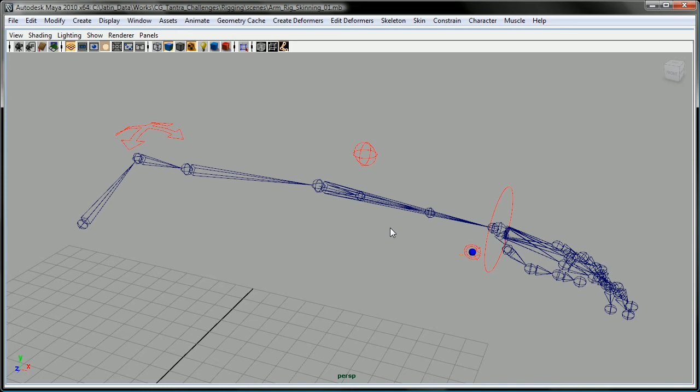And right now it's 3 a.m. in the morning, and all the dogs are barking in the street because I'm the only person awake at night. So let me explain some stuff about how I did this rigging, and let me open the hypergraph first.

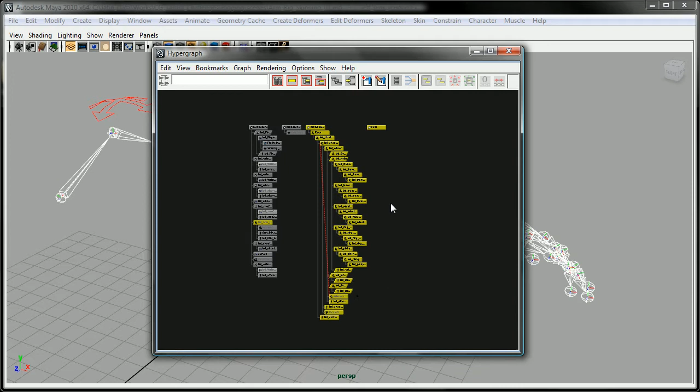If you check it out, my hypergraph is pretty simple. These are the skeleton structure and some constraints I used, and these are the control groups, and these are the mesh groups.

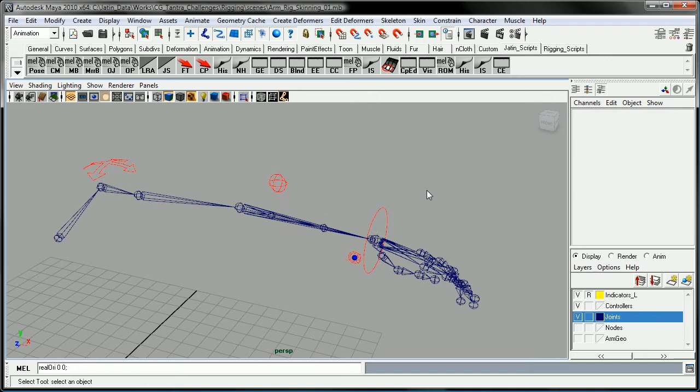Just a second, let me take out all the unwanted things. So you can see some pretty simple stuff, just like normal rigging. This is the IK setup.

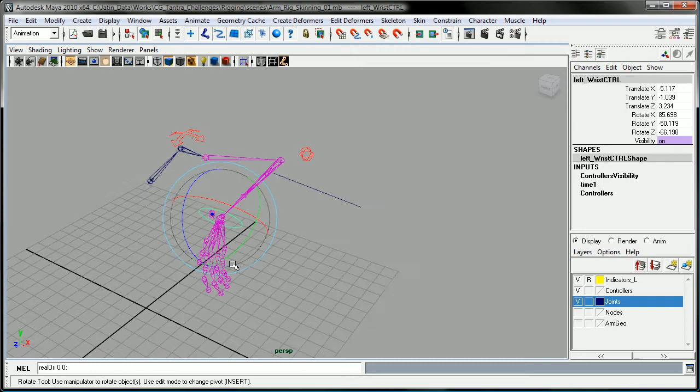You can set the IK, and you can twist the wrist and rotate the wrist. This is for the pole vector control, like twisting the elbow and all that stuff. This control is for the shoulder.

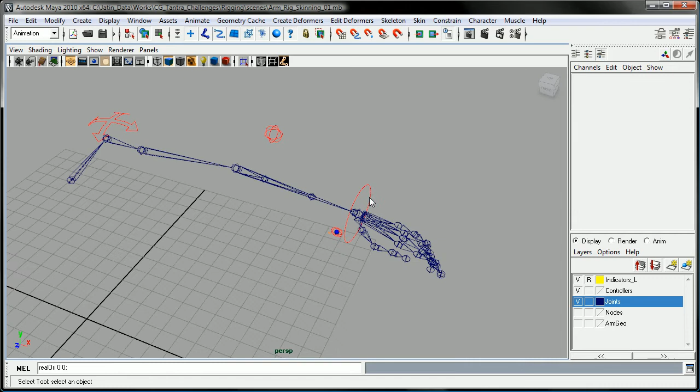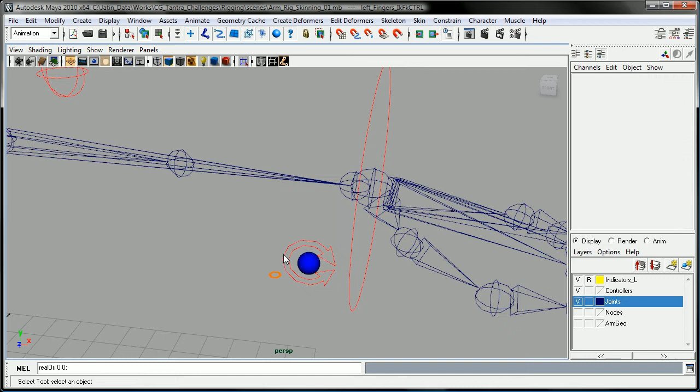Now I created some stretchy joints, a stretchy IK setup. The main thing I did was add some indicators so the animator can understand what's going on and what parameters are already set. Here I created one controller for the fingers with FKIK and stretch.

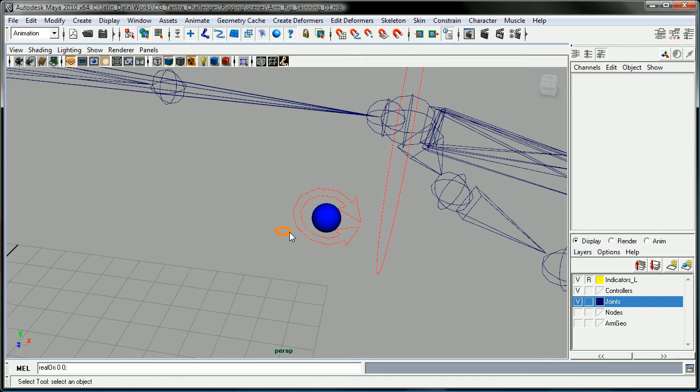As you can see, this is the FK IK setup and this is stretch. Over here you see one sphere with blue color, and here some element — this is basically the stretch IK indicator. Right now stretch is 0, so if I make it 1, it becomes like spring, stretchable. That's why I use this indicator, so the animator can understand the stretch parameter is on.

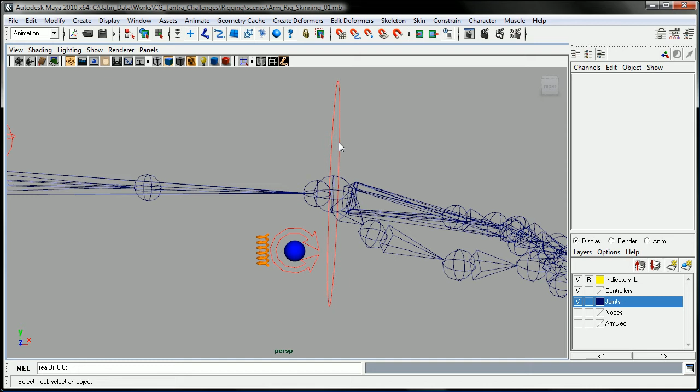So they don't accidentally animate stretchy things if they don't want. The same thing I did for the FK to IK blend — I used blue and green color. Right now it's IK, blue color for IK.

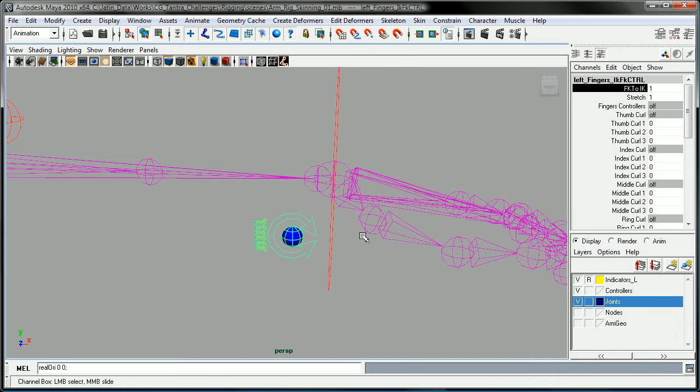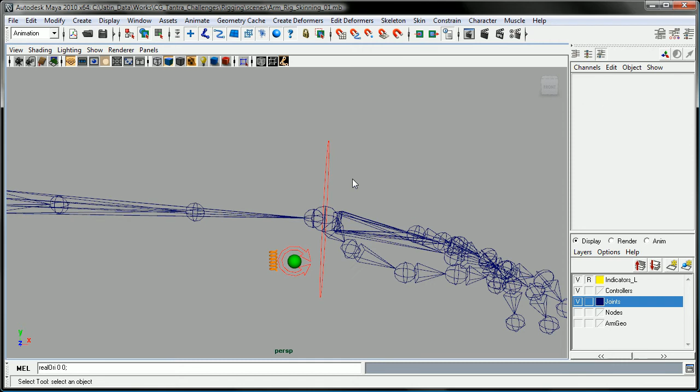If I go to FK mode, the sphere turns green. So the animator knows that green means the arm setup is in FK mode, and blue means IK mode. Right now it's IK mode with the stretchy joint chain.

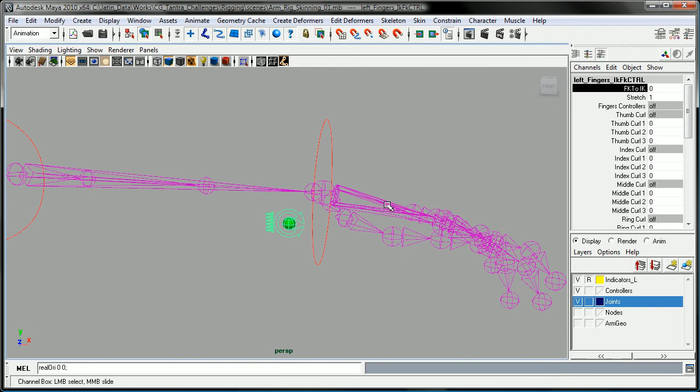You can see it's stretchable here. And if you check it with FK, here are the FK controllers. Okay, cool, and shoulder.

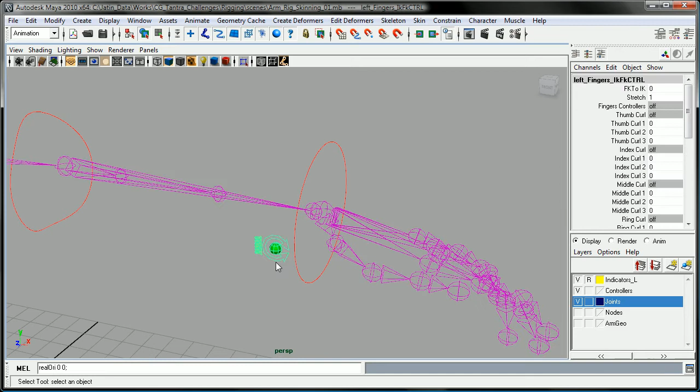Now the main and very important thing I did, which is kind of innovative, is the twisting arm setup. For the twisting arm, I used a couple of joints and lots of constraints and expressions for this entire twisting arm setup.

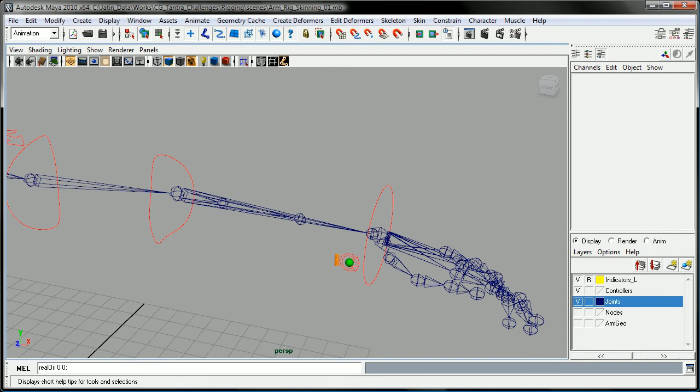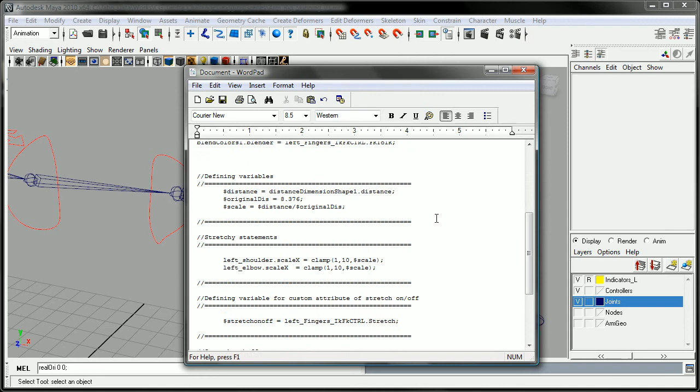If I show you some expressions, here's what I wrote — these expressions are written for this entire rig, especially for some controllers and visibilities, and for the joint stuff and drivens. I used lots of constraints as well.

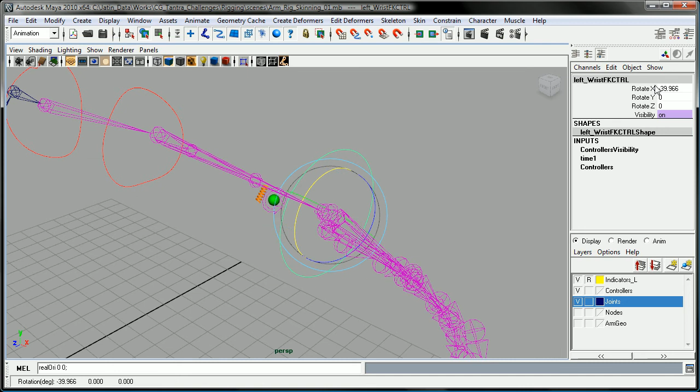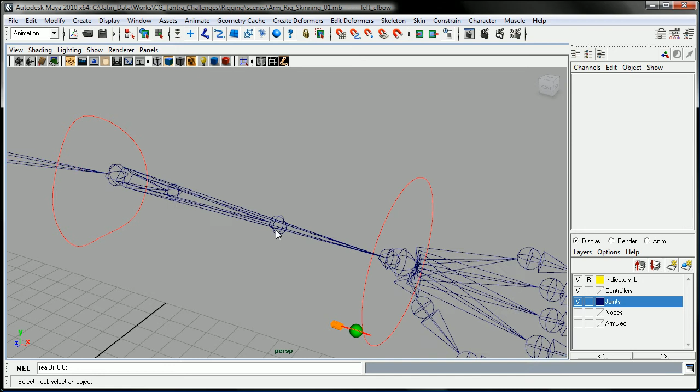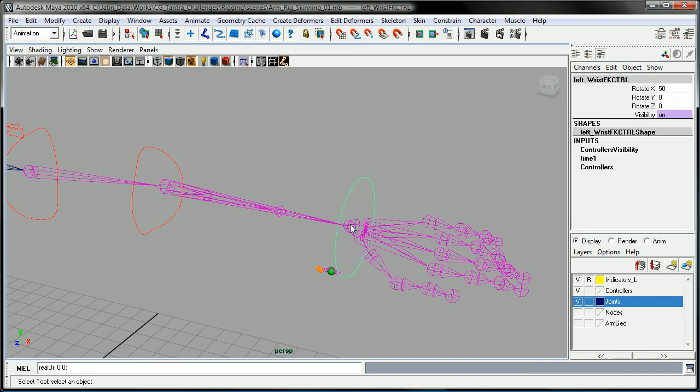This joint is almost half, like 50 or 60% of this rotation value — sorry, this joint has rotation almost 50% of this joint. In fact, I've practically done the skinning and it's working nicely, so I hope to get a good result with this setup.

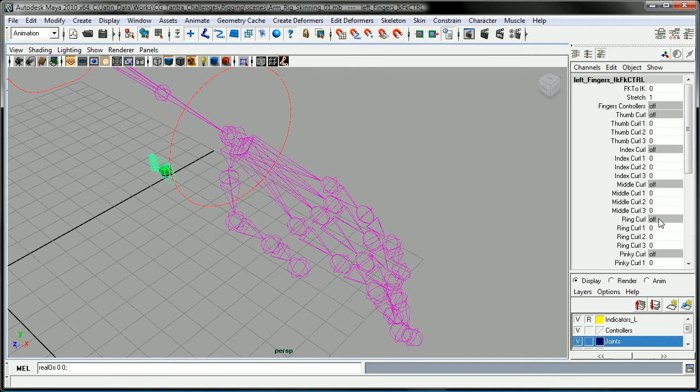Now let me show you some finger stuff. This is pretty simple — all rigging artists do this same stuff. It's nothing special like curling and those things.

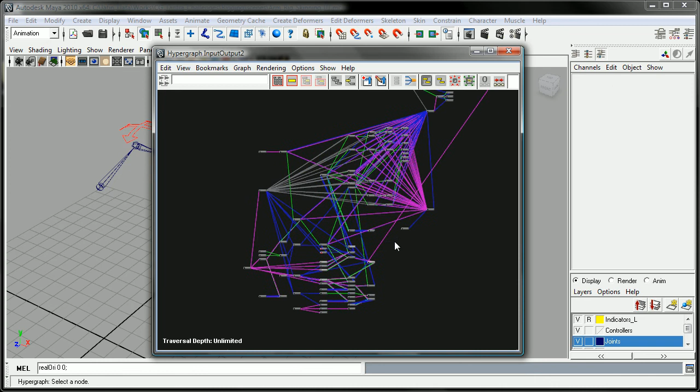Now let me check the hypergraph — let me set the entire graph, just a minute. What I've done is create 3 group nodes, because I don't want to mess up everything, so I arranged all those things accordingly.

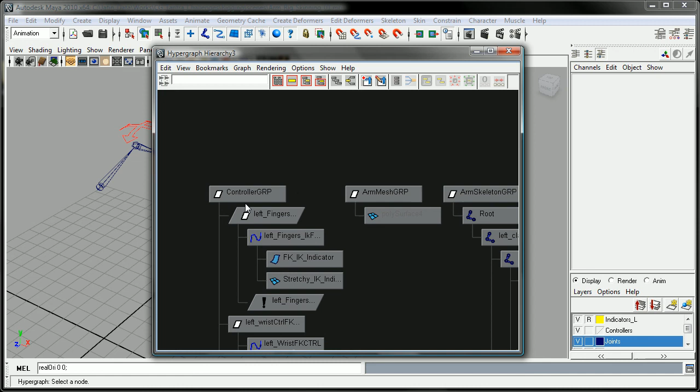I created an entire controller group for all the controllers and parented them all to the control groups. This is the arm mesh, parented to the arm mesh group, and the skeleton group parented to the arm skeleton group.

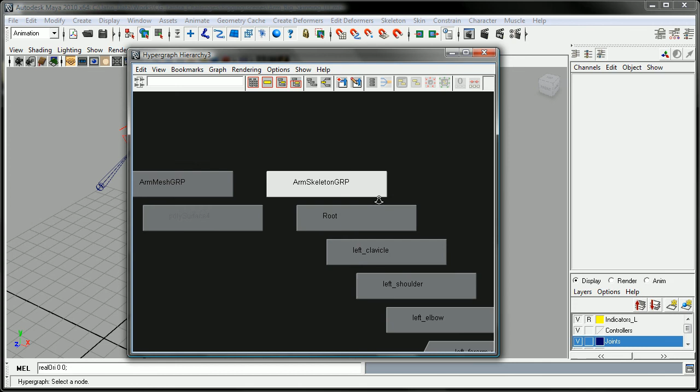Suppose anybody is going to see this — let me check, okay, this is unwanted. So this is a pretty clean and nice rigging setup for this arm, crystal clear, anyone can understand this rig.